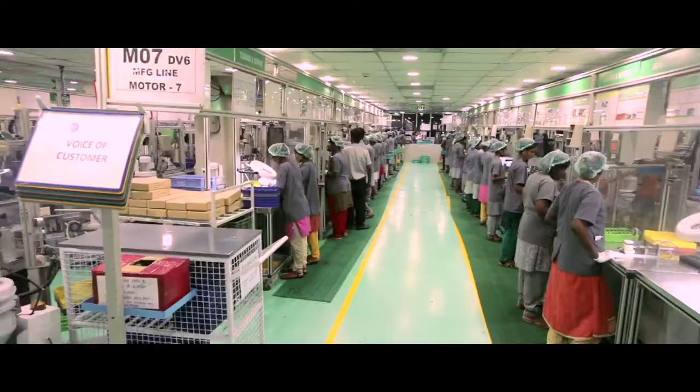Igarashi Motors India (IMIL) is primarily engaged in the production and export of permanent magnet DC motors for the automotive sector, specifically for passenger cars. IMIL's key product application is electronic throttle control (ETC).

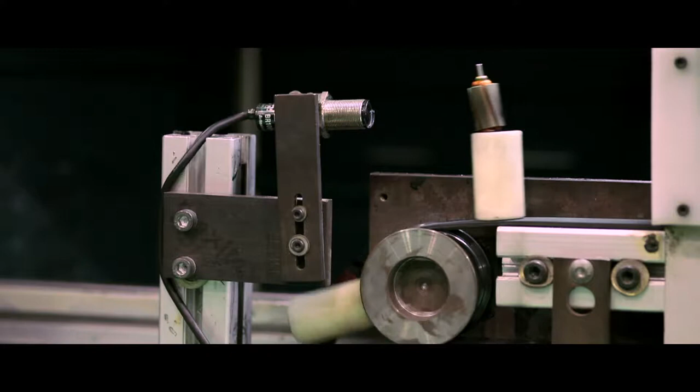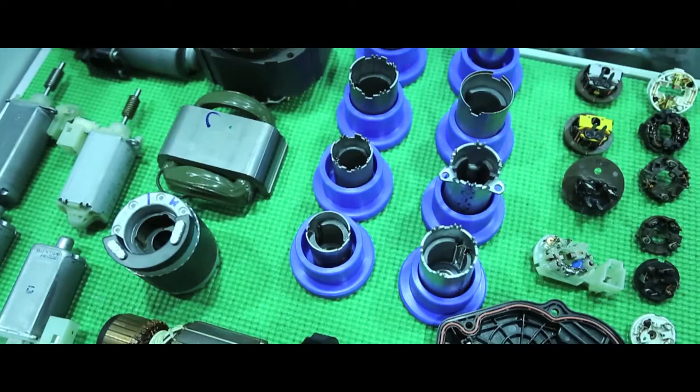IMIL is a leading global automotive component market player in actuator motors, a variety of DC motors. Since 1996, IMIL has supplied over 500 million DC motors globally for usage in actuator applications and systems in passenger cars.

IMIL has two units in MEPZ SEZ Chennai. Unit 1 is situated in plot number B12 to B15, Phase 2, and Unit 2 is situated in plot number A8 to 10. Certifications: ISO 14001 in 2015, TS 16949 in 2009.

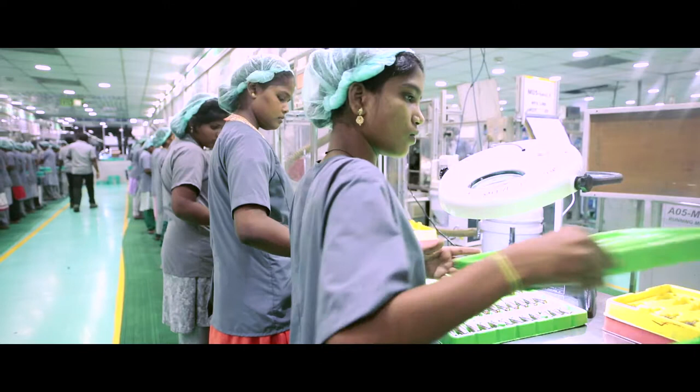We are the largest manufacturer of DC motors in India by volume. IMIL manufactures armature subassemblies, brush card subassemblies, stator assemblies, and motors with accessories.

Some of our key customers in alphabetical order: Bosch, Borgwarner, Cooper, Conti, Delphi, Dell'Orto, Magneti Marelli, Mikuni, Pierburg, Visteon, Valeo.

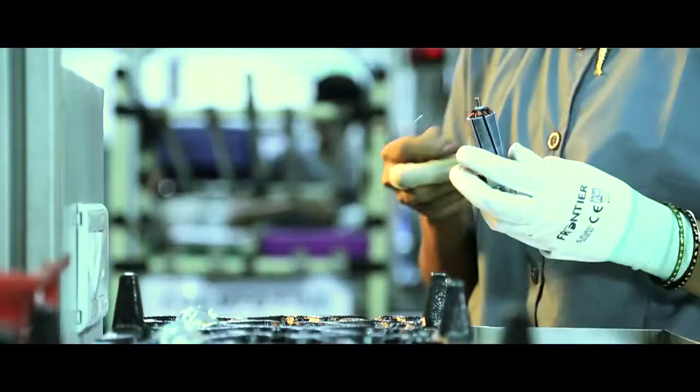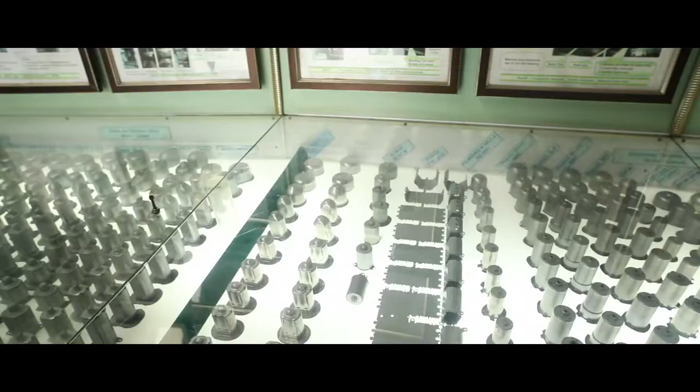Key highlights: Igarashi India specializes in the manufacturing and export of DC motors and motor subassemblies to the global automotive industry. Igarashi India has carved out a global market share of 35% in electronic throttle control (ETC) motors, which is part of the torque actuator motor (TAM) family and a niche application of auto DC motors.

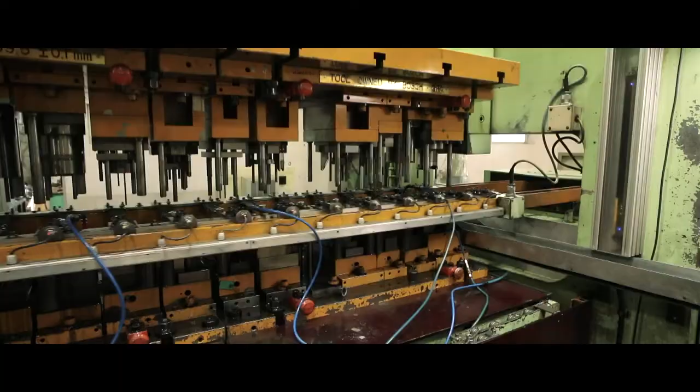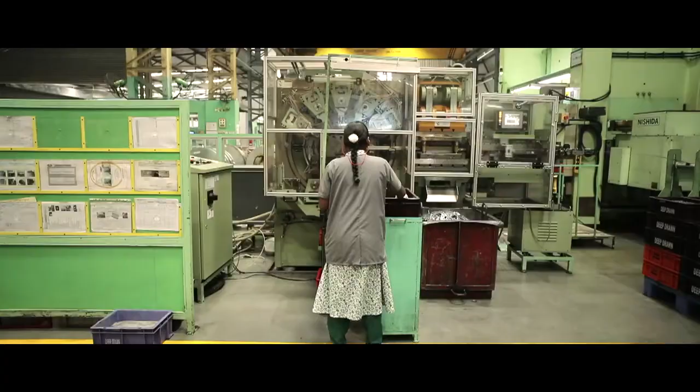Igarashi's key strength has been making high-quality motors at the lowest manufacturing cost compared to global peers - the lowest cost producer of chosen motors, with a vertically integrated manufacturing model, global economies of scale, and global quality levels of less than 3 ppm rejection.

Igarashi R&D facility. Research and development is an important means for achieving future growth and maintaining a relevant product in the market. Companies often spend resources on investigative undertakings in an effort to make innovations that can help develop new products or processes, towards enhancing pre-existing products or manufacturing processes. These activities come under the research and development umbrella.

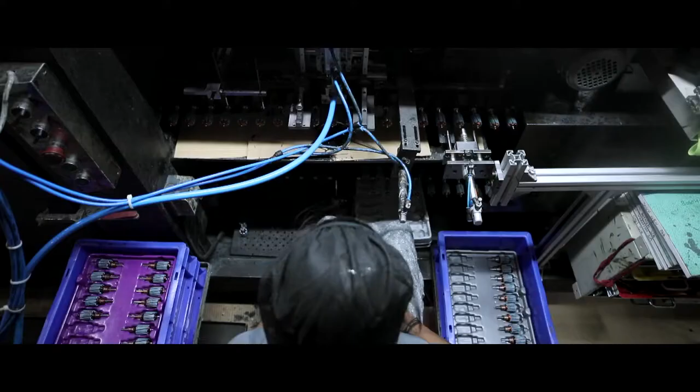A dedicated team works day and night to prove that the design intent is meeting the end customer requirement. The capacity range is from 1000 to 1500 kgf, which can develop a maximum acceleration range of 90 G.

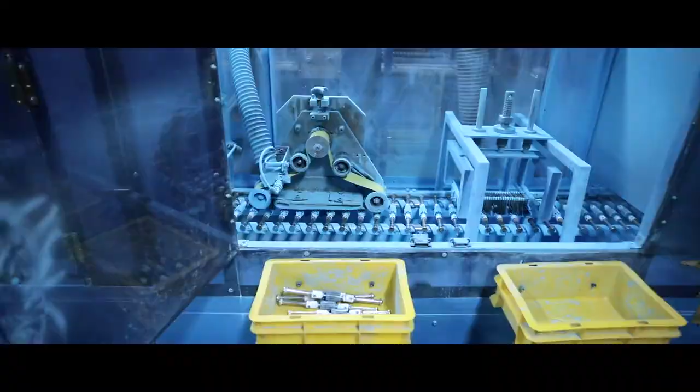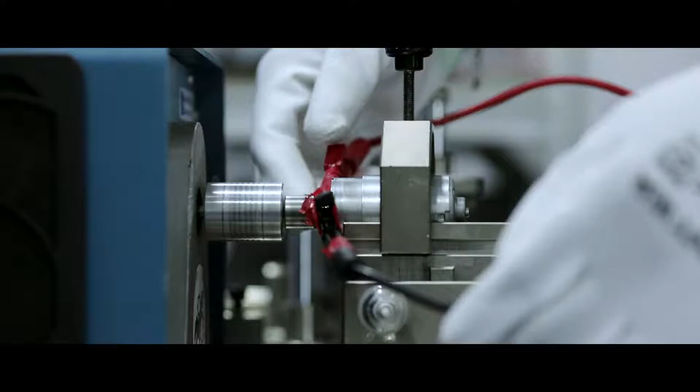Igarashi Motors India, one of the pioneers in manufacturing small motors for engine air management systems in the country, has ventured into creating an exclusive R&D facility in its Indian operation. The result is a dedicated research center called Tech Wing, formed to cater to the increasing demand of the global automotive and consumer needs.

A pool of 50 engineers are continuously engaged in this facility to work on innovative solutions to substantiate market needs, featuring high performance, small size and less weight. The management of Igarashi India took a rational decision, keeping in mind the future needs of the ever-growing motor industry.

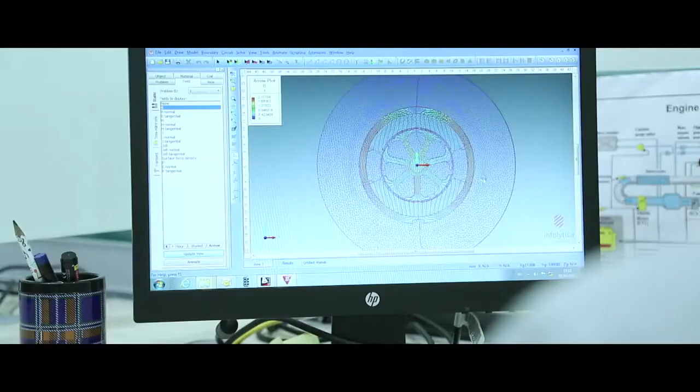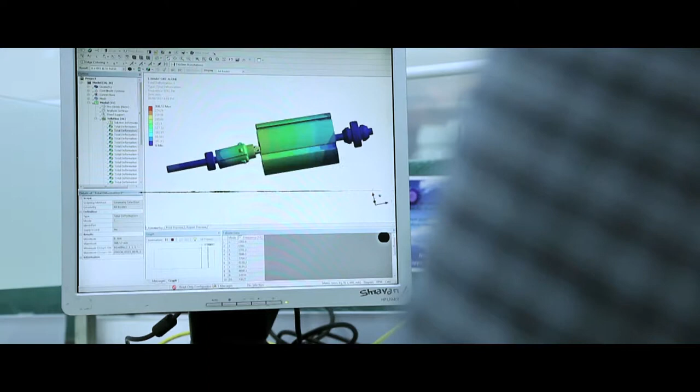Research and development process: R&D may take months or years to yield fruitful results. Manufacturers of a variety of products utilize this process for new product development and innovation. Though each company or industry may have its own unique research methodology, a basic research process will use the following framework.

Generate, focus, develop, prototype, validate, release. Generate ideas:

At this point, the research team may sit down to brainstorm. The discussion may start with an understanding and itemization of the issues faced in their particular industry, then narrowed down to important or core areas of opportunity or concern.

Focus ideas: the initial pool of ideas is vast and may be generic. The team will then scrutinize and locate ideas with potential, or those that do not have insurmountable limitations.

At this point, the team may look into existing products and assess how original a new idea is and how well it can be developed.

Develop ideas. Once an idea has been thoroughly researched, it may be combined with the market survey to assess market readiness. Ideas with true potential are once again narrowed down and the process of turning research into a marketable commodity begins. To target the feasible ideas and reject ones that are far-fetched right at the initial phase itself, Igarashi is facilitated with advanced tools.

The electrical design team is equipped with softwares, FEMM, Speed, and Magnet that simulate the motor behavior, and the electromagnetic fields can be analyzed.

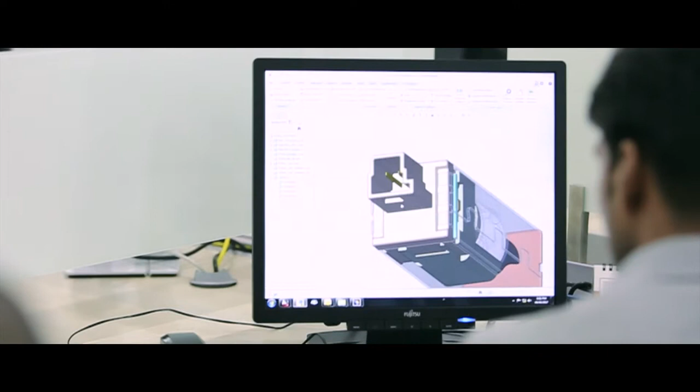The concept design is done using computer-aided designing and engineering softwares, CATIA, Creo, SolidWorks, and AutoCAD is used for detailing. The mechanical design team works with FEA, ANSYS, and SolidWorks simulations to understand and better the structural and thermal behaviors of the motor.

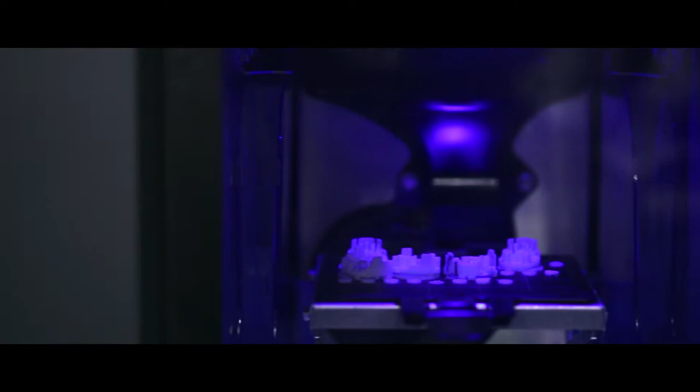To bring down the prototype time, we are equipped with an advanced printer that can print the model in 3D, which helps to view the part or assembly before actual tooling and manufacturing. This saves the tooling cost and gives more perspective.

Tools like DFMEA and DFSS are used to predict design failures at the concept stage itself. All designs are based on the DFM concept.

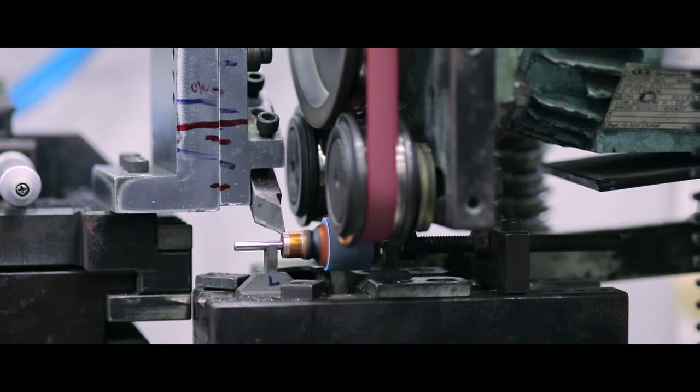Prototypes and trials. Researchers may work closely with product developers to understand and agree on how an idea may be turned into a practical product. As the process iterates, the prototype complexity may start to demand special processes to achieve the design intent.

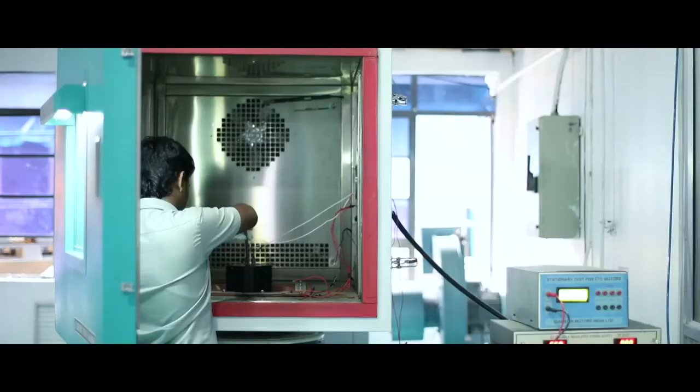Validation. As the product takes shape that began with R&D, there comes the validation part, which is a very important milestone in research activity. Igarashi India has a dedicated product validation facility with high precision systems to verify the product as per the design and customer specification.

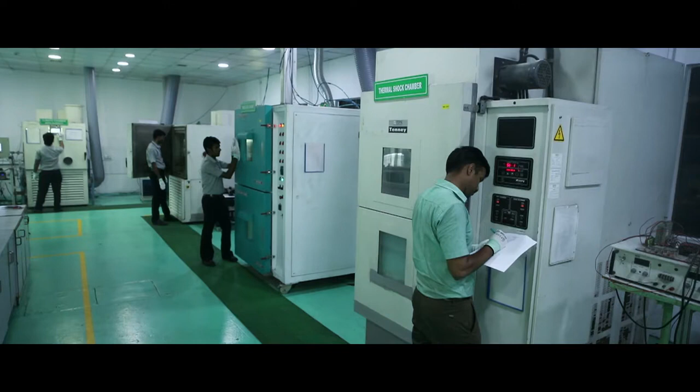Let the ideas be performance related, environment related, or the so-critical vibration related, Igarashi India has state-of-the-art devices and equipment.

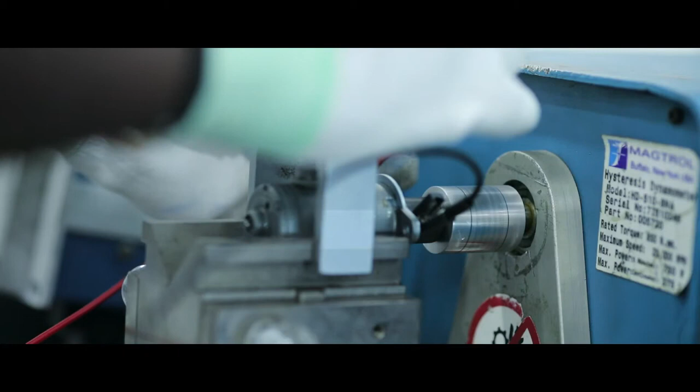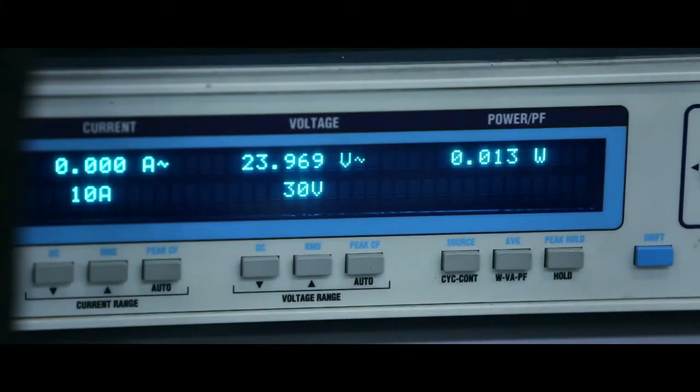In general, testing small motors is a cumbersome process, but the Magtrol dynamometer test equipment makes life easier with its precise measuring capabilities. This device has the capability of measuring the motor performance to 1 millinewton meter accuracy, fully controlled by M-TEST 7 software for brushed motors and a dedicated test rig kit for BLDC motors.

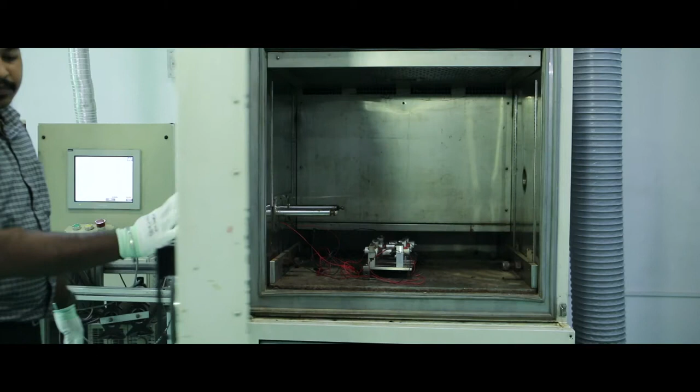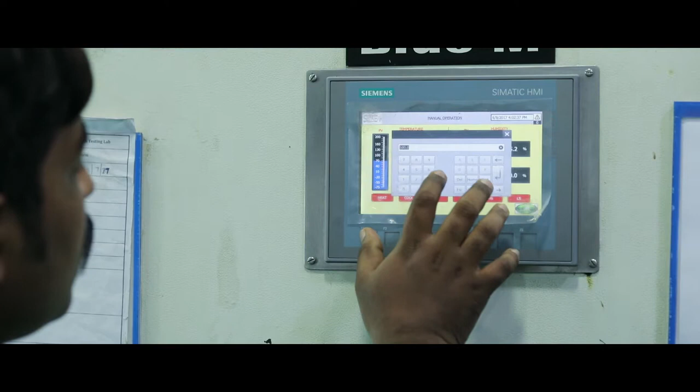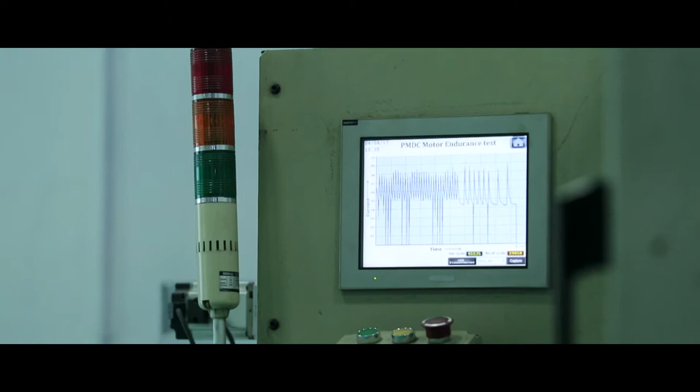For material-related testing, the contribution from the environmental chambers is quite high. This equipment is capable of reaching -70 degrees Celsius to +200 degrees Celsius to validate the structural capabilities of the critical plastic materials, which is a prerequisite of the application. This ramp-up of temperature from one end to the other can be done in 10 seconds.

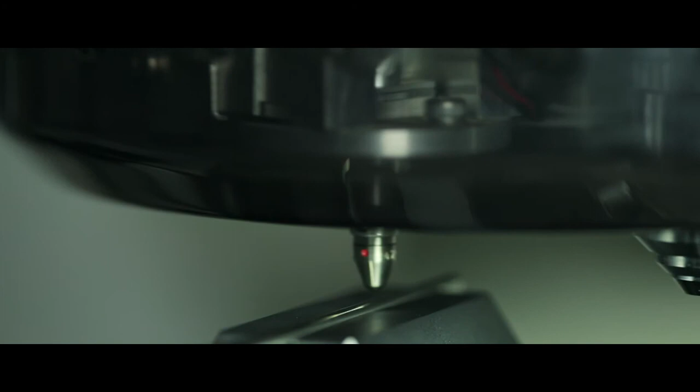Thermal combined vibration test is a significant requirement for engine management systems that has become mandatory to ensure the structural capability of the product. Igarashi India has understood this very well and invested in vibration equipment generously to cater to the market need as well.